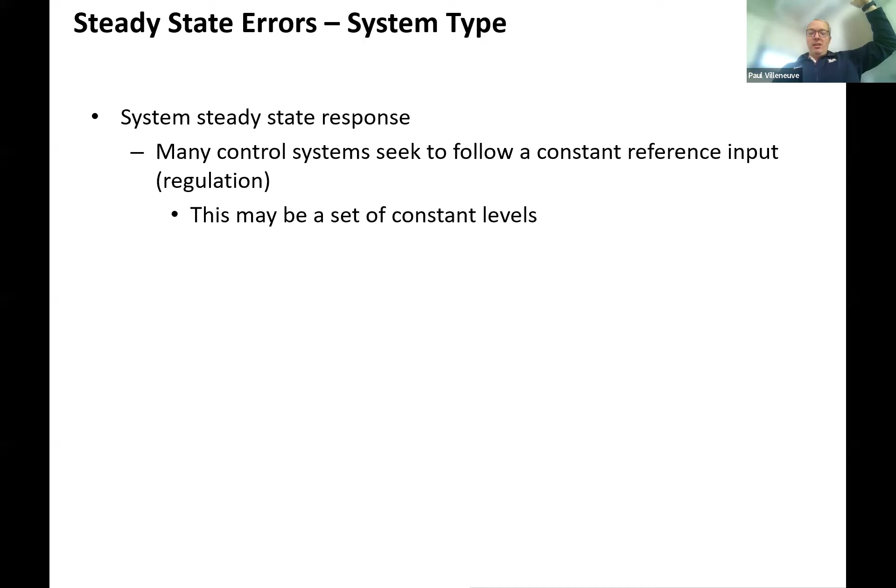Normally, at least in the process control world, we want things to go to a set point that's fixed, right? We want it to be 82, 36, whatever value we want. It doesn't necessarily have to be, though.

So maybe we want something that is ramping, like tracking. You're trying to track a missile, let's say if you're doing defense and tracking a missile in the air. The distance away from you is increasing, probably at a ramp rate, or maybe its speed is increasing. We don't necessarily know, so if we're tracking something, we need to be able to adjust at a ramping rate.

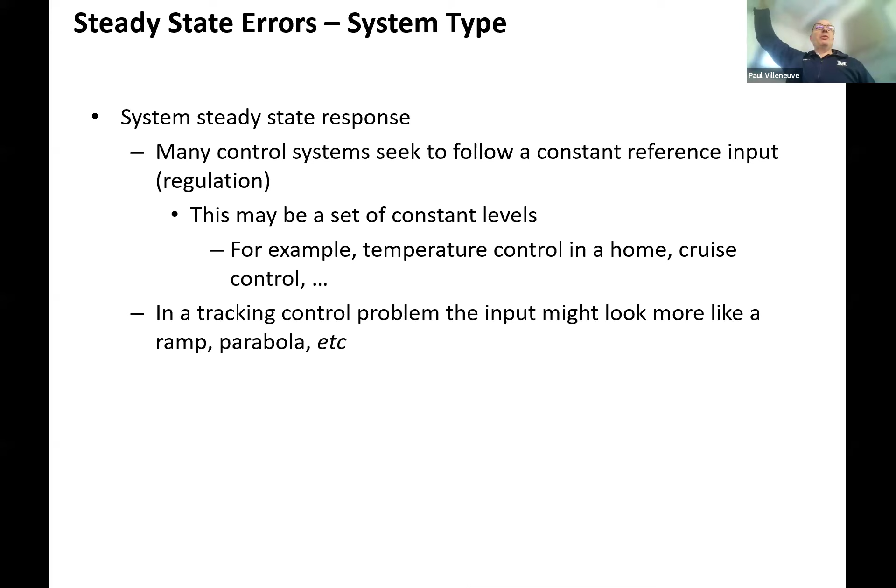We could also do sinusoidal, oscillatory ones, but we tend to not worry too much about those, because for the most part you don't want something swinging back and forth necessarily. That would be very difficult to control. So let's take a look at our control system.

This is a closed loop control system, and you'll notice it has unity feedback. This is not a requirement of a system to calculate steady state error, but it's usually preferred and desired. The reason why: this is my set point and this is my output. My error should be the difference between the set point and the output, right?

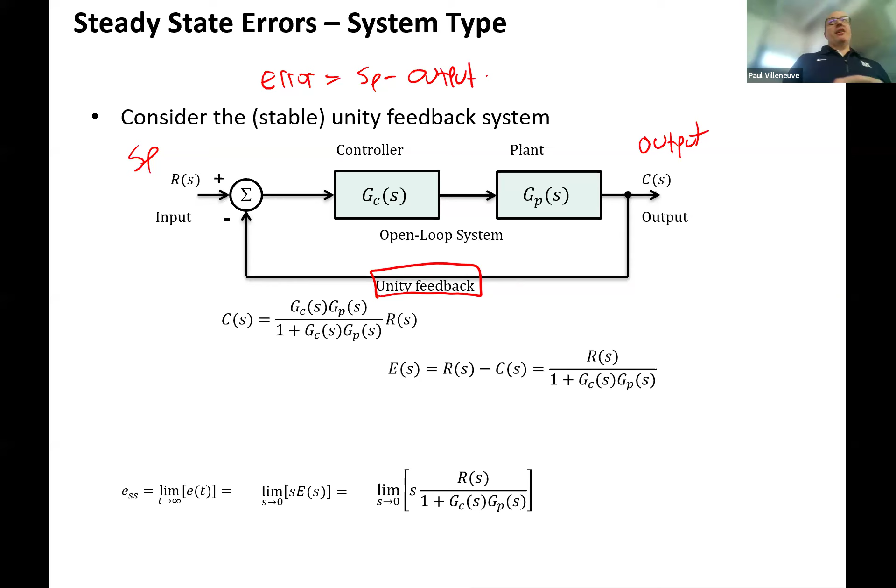So if your output can't be exactly compared against your set point, then you have to put an H block in there. Technically speaking, you aren't really calculating steady state error if your H isn't unity. It's still okay though. So technically this signal here would not be an error signal, it would be maybe a delta or a difference between my set point and the fed back output. So it's not a direct comparison.

But if we assume H is going to be equal to 1, then we're in good shape. If H is not equal to 1, what changes? The only thing that changes is we have to include an H over here. So if H is not equal to 1, you'd need to include an H here and then an H here. But for now, let's just assume H is equal to 1 to make it easier.

These two blocks are in cascade. How do I manage blocks that are in cascade? What do I need to do to them?

Multiply them together, so this becomes GC and GP. This is negative feedback. Remember, the transfer function for a system in negative feedback is the forward path over 1 plus G times H. H is equal to 1.

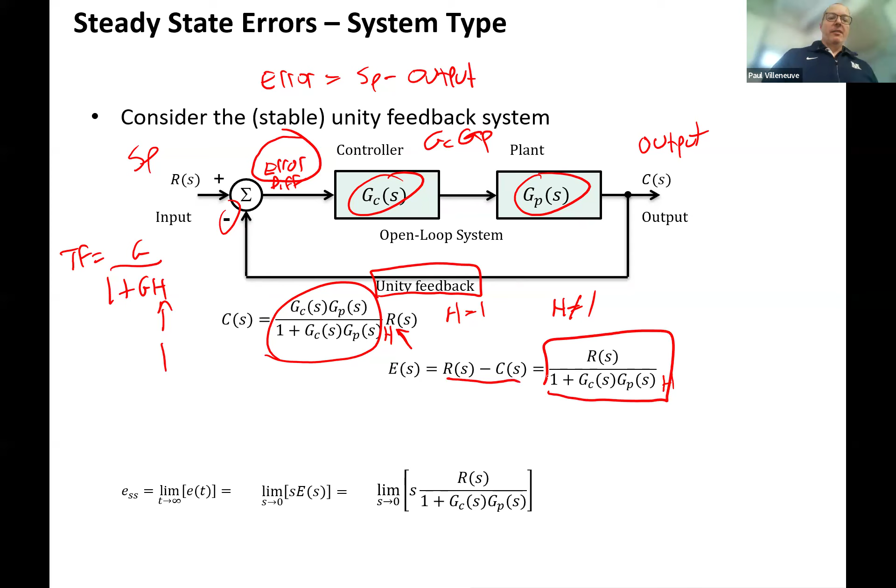Does anybody see or want to see how I got this expression here? Or does it make sense to you? How did I go from this part essentially to this? You all see it? Does anybody want me to do the work? How about I just do the work, because I can do it faster.

So R of S is my input. I'm just going to call it R minus C, but C is defined over here as GC, GP over 1 plus GC, GP, times R. Everybody okay with that? That's the error, equal to that.

Now, common denominator, right? So everything is over 1 plus GC, GP, which means I need to multiply that first R by 1 plus GC, GP, and then subtract GC, GP times R. I can see that the R times GC, GP is going to cancel this GC, GP, R. So what I'm left with is R over 1 plus GC, GP, which is that term right there. Just a little bit of algebra to get there.

Okay, now that's the actual E of S system. So if I want to calculate what E of T is, I can bring this back to the time domain doing partial fraction expansion and do all that. Well, what I'm more interested in is over time, what's going to happen, or what does my error look like? Is there a really useful tool that we've discussed in this class numerous times to get us what that error is going to be at a long period of time?

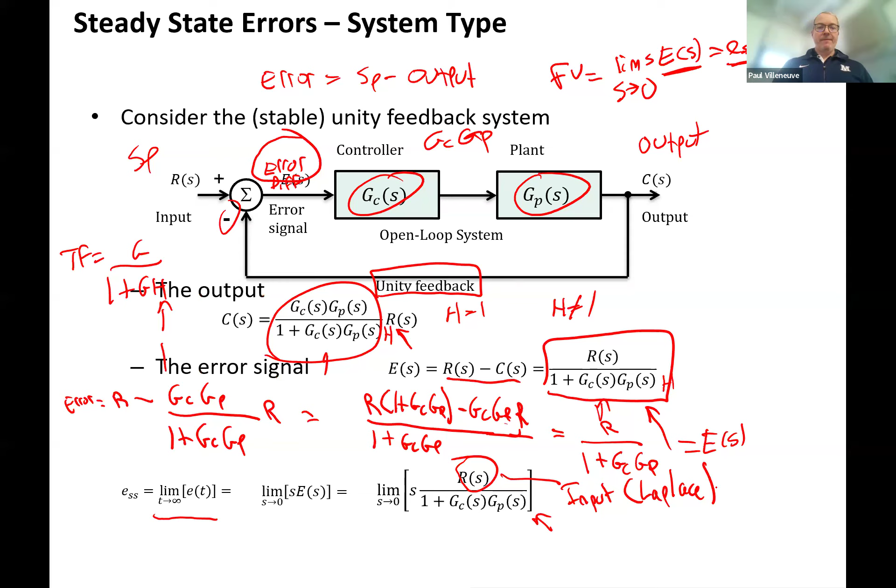Okay. Well, before we can do that, we have to define this term. So we're going to define an open loop transfer function.

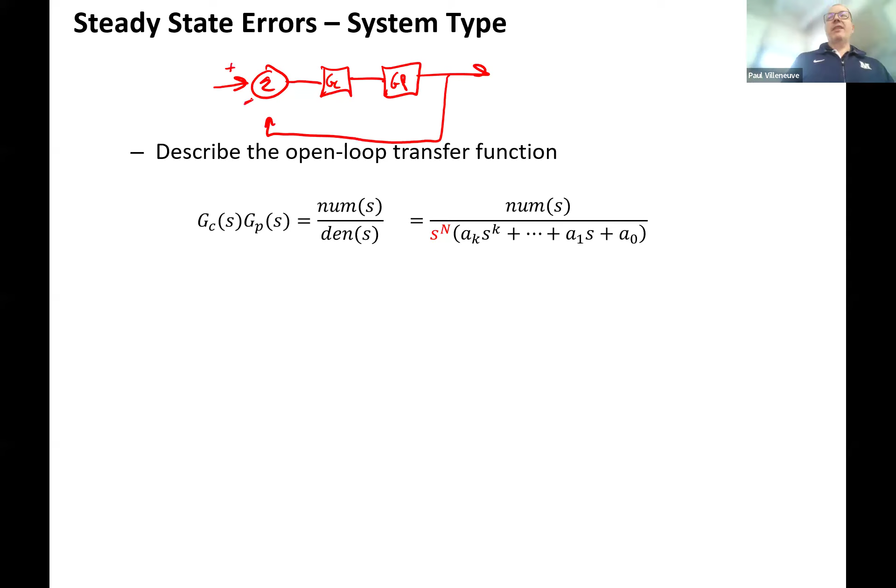And when you think closed loop, we go all around the path. Open loop means stop right there, don't actually close the loop. So if I wanted to get the gain to this point, we'll call this, I don't know, not C of S, but EET for lack of a better expression. We'll call that EET of S. How do I get a transfer function for EET of S?

That's just my input times these two feed forward paths. Stopping right here, that's R, GC, GP. So if I wanted to do a transfer function of output over input, that's just GC, GP. This here is really important to us because it really tells us a lot about the characteristics. This is the open loop gain of our block diagram, and it's essentially open loop because this here is not connected. That's why we call it open loop.

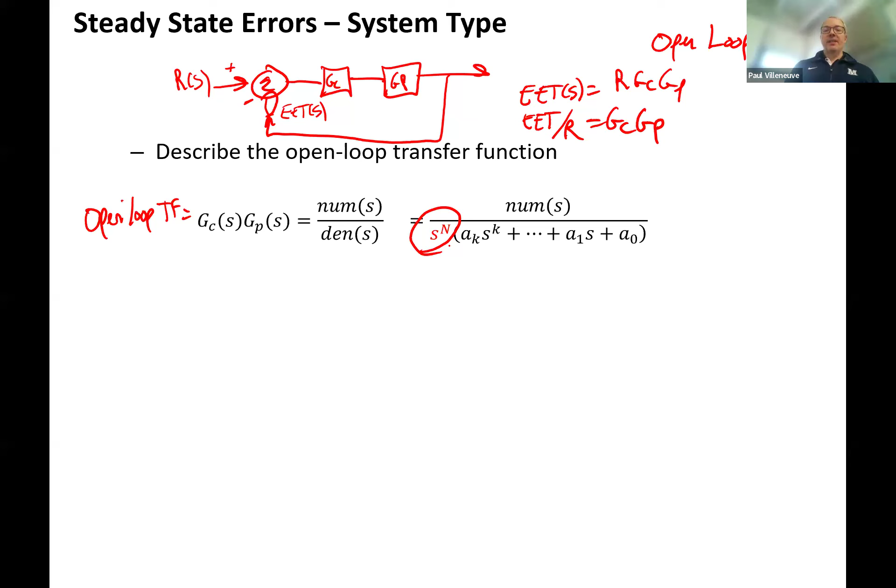The loop is not closed, it is open loop. So if we define our open loop gain or transfer function equal here, we know that when we multiply those out, we're going to have a numerator and a denominator, both functions of S. If we can factor out our S term, so let's say at least one value of S is multiplied by all the coefficients, then we can factor that out front. This term N tells us the number of S's that we can factor out of our system. That's so important, we're going to call that N the system type. So if you have a type 0 system, how many S's can you factor out?

None, because it's 0, because S to the 0 is equal to 1, isn't it? So I can't factor any of those out. I'm just multiplying by 1, right? I can put any coefficient in my polynomial and then multiply it by 1, and it doesn't change anything.

So a type 0 system has no S terms, right? A type 1 is S to the 1, which means in my denominator it's going to be 1 over S. A type 2 system is S squared, which means in the denominator you're going to have 1 over S squared.

What is dividing by S equal to in the Laplace domain? Taking an integral. This is equivalent to integration.

Now let's think for a second. If I have error in my system, does an integrator help or hurt the error? Remember, what is an integrator doing? What is the base definition of an integrator? Go back to your Calc 2 class. What is an integral doing? It calculates the area under the curve, right? So what's that? It would help?

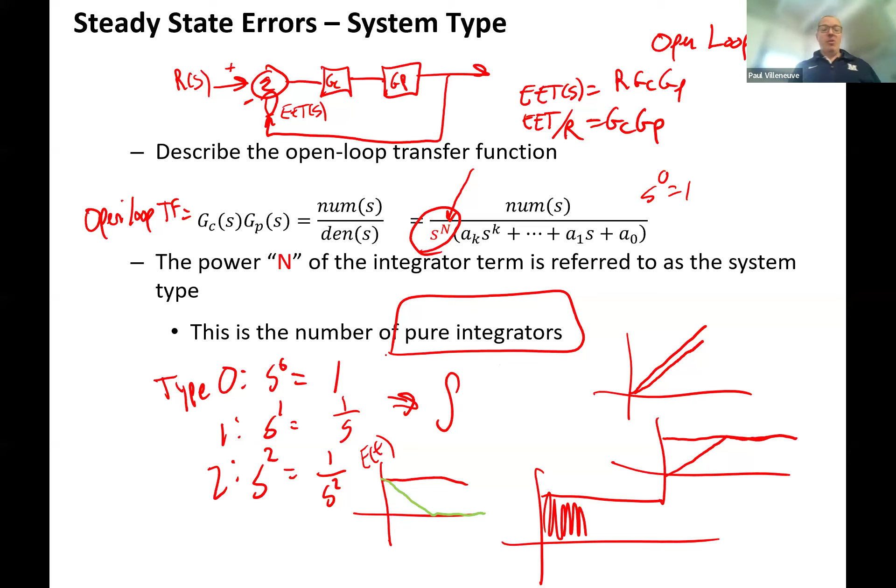What's the bad thing about an integrator, mathematically speaking? It's just perfectly happy if the error is still doing this, right? If it's a rectangle, it's going to keep integrating until it gets to a really crazy high number. And so the problem with integrators is sometimes if your integrator is set too high, it goes to this really high number, and then your control system finally responds, and then you've got to bring the error back down all this way, and then you need a lot of error in the wrong direction, so you end up kind of oscillating back and forth. And so you have these wind-up limits so that your integrator doesn't just go to this really crazy big number, it locks or stops at a certain value. And you can take a look in most control systems books, they actually provide that capability.

All right, so let's do math, and let's take a look at our steady state error. So our input here is a step input. Notice the U of t, that just means a unit step. If you remember from your Laplace table, a unit step input translates into 1 over s.

We got to be careful because a unit step input also looks like 1 over s, where an integrator is 1 over s. But one is an input and one is the mathematical operation. So the transfer function, if it has 1 over s in it, means there's an integrator there. If the block diagram has a 1 over s built into it, that's an integrator. But if I input it with a step input, that's the 1 over s that comes out front. That's the only time you'd see a 1 over s in the input stage, cases when you have a DC or a step input. We'll just pick some random value, some unknown value of magnitude. It could be 1 volt, 12 volts, 5 million volts, et cetera. The value of A is just what it needs to be.

Let's go ahead and plug that into our generic steady state error calculator. So we grab this from before: limit as s approaches 0, s times A over s, which is equal to R of s. We're going to put that right into here, and then divide that by 1 plus GC GP. Now this here, we want to rewrite it: this is A over s times s times 1 over 1 plus GC GP, correct? The s terms cancel out, don't they?

Why do I have 0 here? Let's see. I'm going to bring up the whiteboard. I'll do up the maths so we can see it all. So we'll look at the transfer function again. We'll go back to the base transfer function that starts.

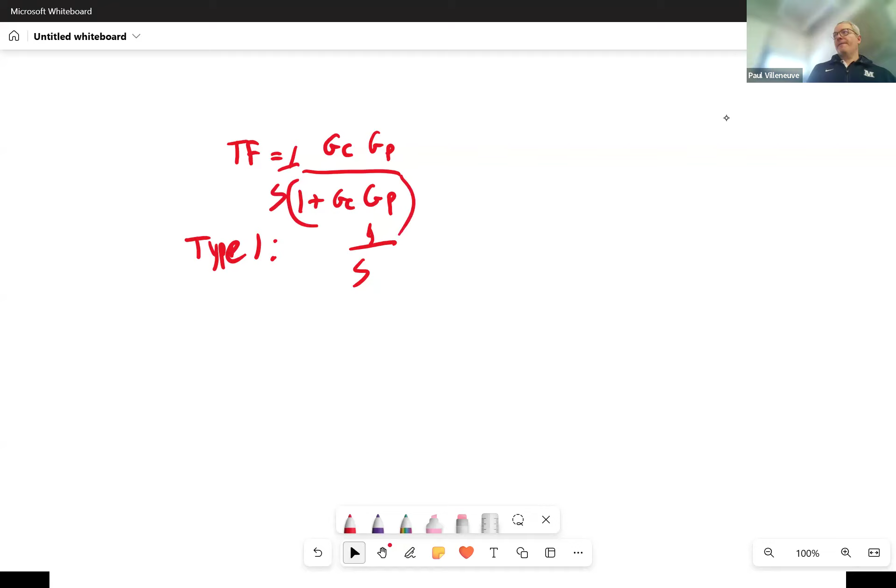Alright, so we had our transfer function equal to GC GP over 1 plus GC GP, correct? And a type 1 system means we have at least 1 over S here. So actually Noah was right, we should have a 1 over S out front of the whole thing, correct? Not just on that term. So that was incorrect. So this here should be A over S times 1 plus GC GP, correct? And if we take the limit as S approaches 0, that whole denominator term goes to 0, correct? So that means ESS is going to approach infinity. Okay?

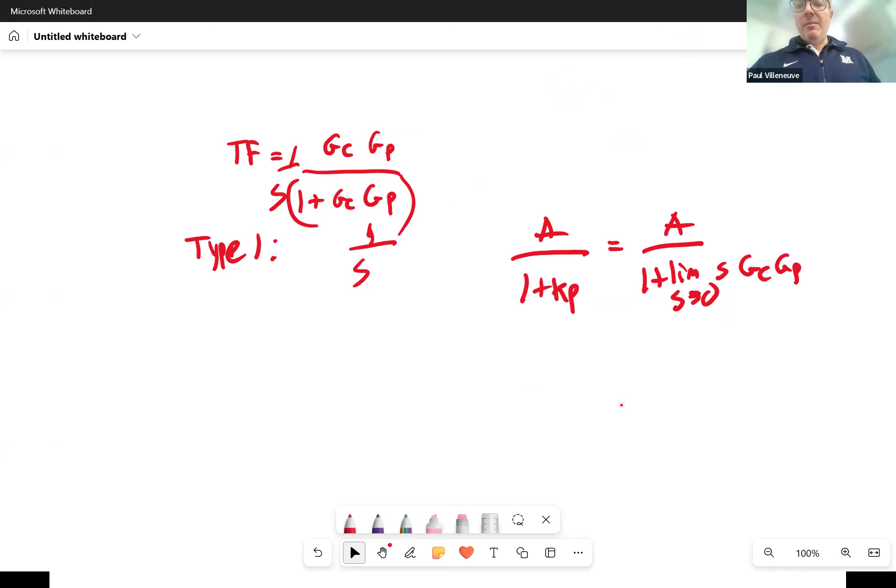So if we have a type 1 system, which means our input is not E sub SS, not 0. It's 1 A... so it's A over 1 plus K sub P, which is equal to A over 1 plus the limit as S approaches 0, S times GC GP. So my K sub P term is going to be equal to the limit as S approaches 0, S times GC GP, which means that's going to be equal to 0. Am I getting infinity?

Let me think for a second. Oh, I get it, sorry. No, it's 1 over S, right? We have an S in the denominator, not in the numerator, because an integrator would be 1 over S. So this is 1 over S, which means that term is infinity, not 0. So A over 1 plus infinity, what's that going to be equal to?

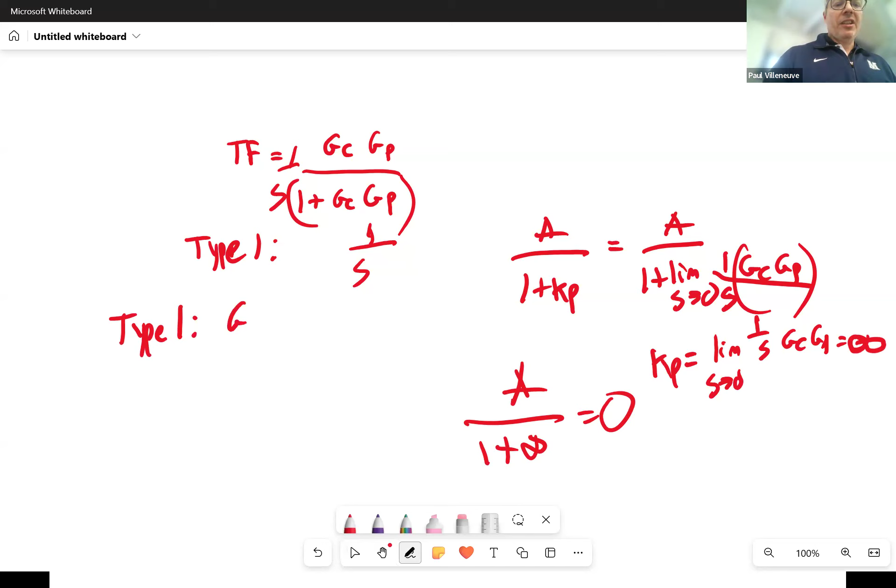0, that's equal to 0. Yeah, so the problem is when I do my, when it's a type 1 system, I should have GC GP is going to be equal to 1 over S times a numerator and a denominator. So when I take the limit as S approaches 0 of 1 over S times that, that's when 1 over S, the S term goes to 0, but the 1 over S term goes to infinity. Say that again.

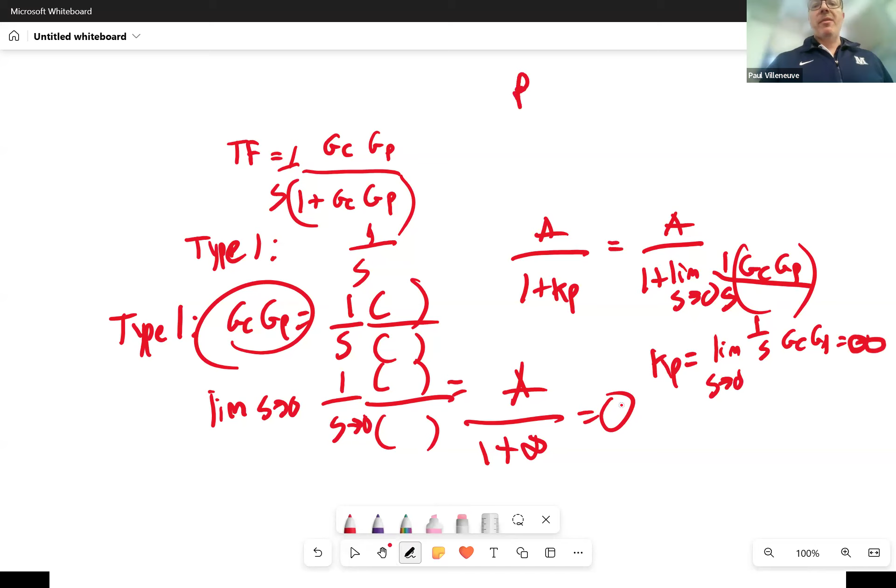Well, this is the K sub P term. There is no A. That's only when I'm calculating the steady state error. The A term comes about, remember, from R of S is equal to A over S. Right? So in the numerator, there's no A term. It's only when we add in the input. So sorry about that, this should be 1 over S there.

So anyway, with a type 0 system, we have to get some steady state error. That's A over 1 plus K sub P. For a type 1 system, our K sub P term is going to be equal to infinity, and our steady state error is going to approach 0, which kind of makes sense. Do you remember how we talked about a unit step input?

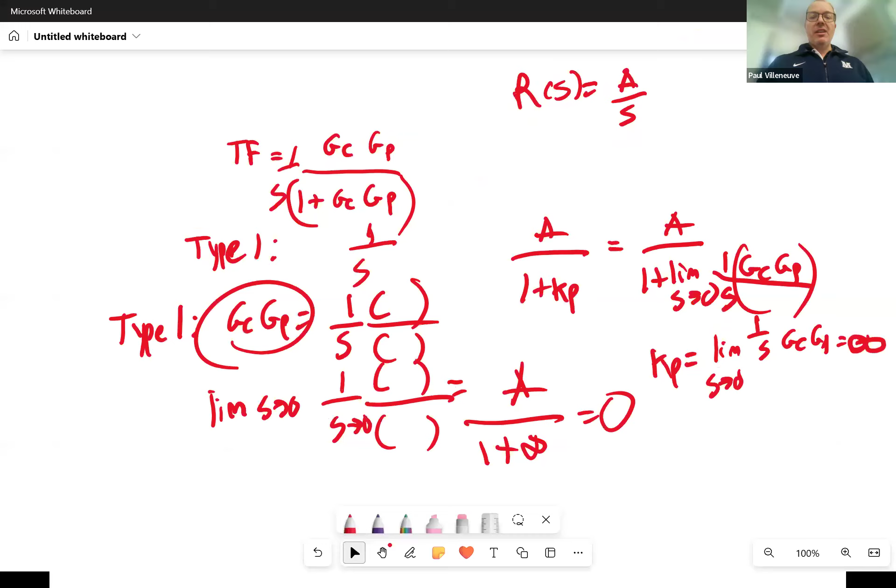So if we have a unit step input here, if we don't have an integrator, if we just have a proportional only controller, what ends up happening is our output is going to do something like this. And that error is going to be constant. Right? So this is the output.

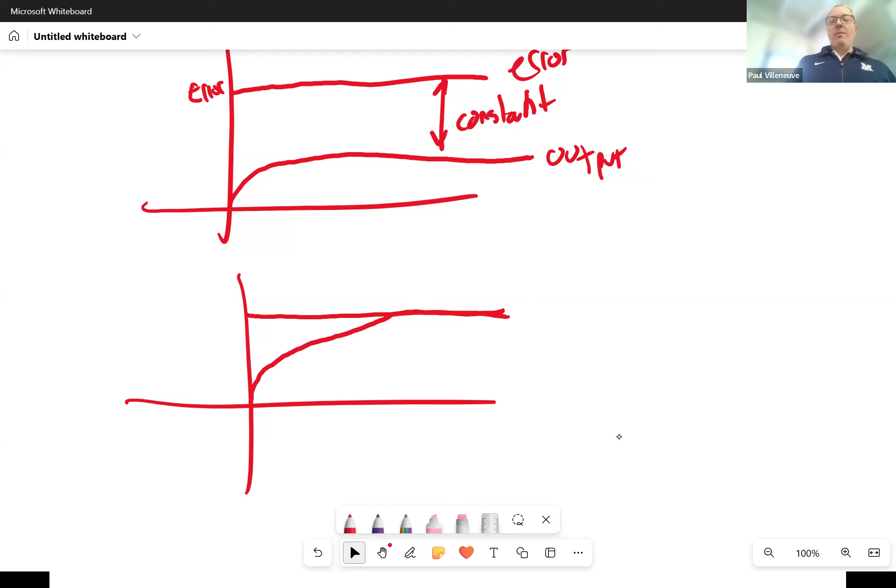And that is the error. If I add an integrator, so this is the error, you know, the nominal error if it was allowed to persist forever. Over here, I have this value. Now I'm going to ramp up, and at some point, my output is going to match what the error signal would be, and then it drops away.

So this would be proportional only. And this would be proportional plus integral, right? So by adding that integrator to our system, we've actually gone ahead and made it so that we get no steady state error. So again, think about it in terms of industry, proportional and integral controller. If we're trying to maintain the tank level at 30%, we can get the tank level to 30% if we add an integral. If we don't add an integral part to our controller, then we're always going to have some sort of steady state error.

Usually not. Why would there not be overshoot? Because this is the error before, right? This is the sort of the pre-error.

What actually happens to the error? I guess I'll change it to purple. The error is actually going to start to do this, right? It's going to drop until it gets to 0 and then goes here, doesn't it? Yeah, like this slope here, you know, it's not continually increasing at a constant value. It's actually dropping down. Why? Because the error here, the area under the curve here, is way greater than the area under the curve here.

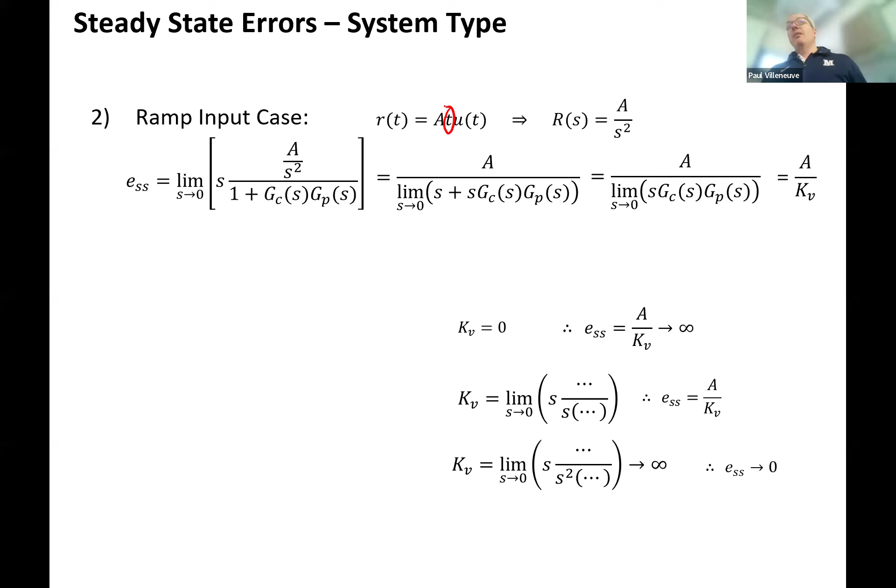All right, so ramp input is A. The only difference now is we have a T term there, right? It's still going to have a unit step multiplier because we want it to start timing at time t equals 0. We don't want it to start at some random time, so we'll start it at time t equals 0 to make our work a little simpler. And this in the Laplace domain is just A over S squared.

Now I'm going to stick that into my generic ESS calculation. And what I end up with is limit as S approaches 0, S times A over S squared, over 1 plus GC GP. As I did before, I'm going to cancel out my S terms. So this one cancels out, but only one of these goes away, right? So the S that I need for the final value theorem only cancels out one of the S terms that are going onto the input.

So now I have A, and I have to multiply. So I move my S down over here, and I'm going to multiply the entire denominator by S. Before, I only multiplied by 1, right? Because these two canceled each other out, so that was multiplication by 1. So we had the 1 plus the limit expression. Over here, we have an S over here and an S over here because we distribute the S term.

A is not dependent on S in any way, shape, or form, so as S approaches 0, it doesn't matter, doesn't care. What about that first S term as the limit approaches 0? What happens to that? Right, because I can break this up into this, this is just the denominator. The first one goes away, it goes to 0, right? So I can ignore it, it's not going to affect anything, it just goes to 0. So all I have left is that second term.

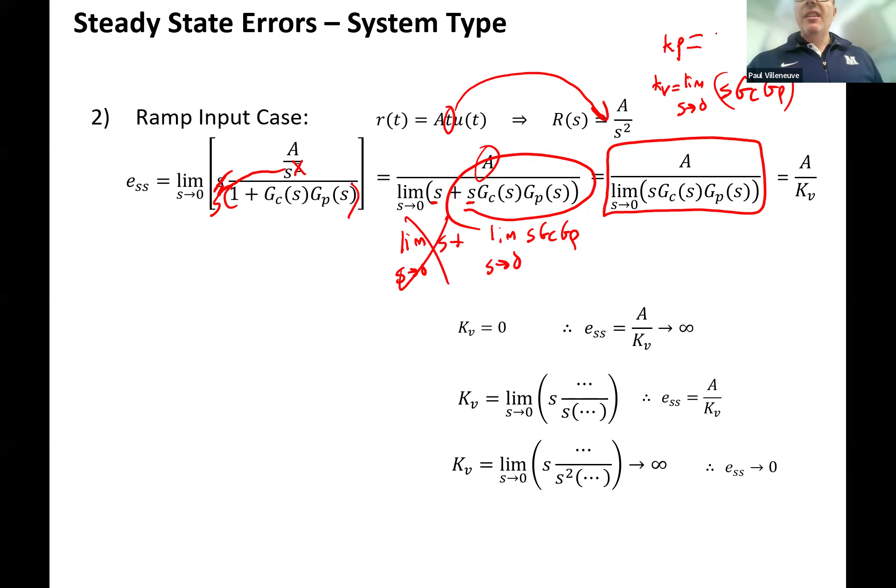Before I called this K sub P, position or proportional constant. What do you think K sub V stands for? Look what you're doing, remember what K sub P was. That was the limit as S approaches 0, GC GP, correct? What's the difference between K sub P and K sub V? The extra S term.

What does the extra S term do? Not yet, just mathematically, like in general. What does the extra S term do? We talked about this all the time last semester. What is the mathematical operation of multiplying by S equivalent to in the time domain? Taking the derivative. If I take the derivative of position, what do I get?

And how do you say rate of change, another term? Slope, okay, keep going. Rise over run. Anything else? Speed. What's another way to say speed? Velocity, starts with a V, right? It's the velocity of whatever it is. Velocity is a more generic term, at least from physics. So velocity.

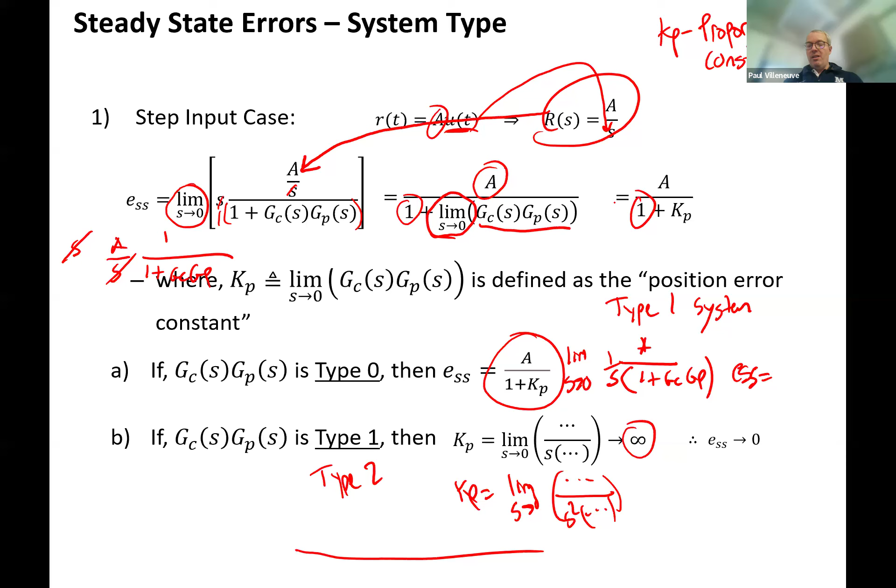So in the case of the P calculation, or the error, the steady state error for a unit step input, we actually had to include the 1. For a ramp input, we only do A over K sub V, and A over 0 is equal to infinity. So it's not A over 1, it's A over 0. So this is equal to infinity. That's type 1, type 0.

Let's move to a type 1 system. Now, type 1 means we have one integrator at S, or one pole at S equals 0, one integrator, and the S terms will cancel out. So now my K sub V term is going to be equal to the limit as S approaches 0, whatever the numerator is and whatever the denominator is. And that's going to be a number, whatever number that is going to be our KV.

And then our steady state error is going to be A divided by K sub V. So what this tells me, if I have a type 0 system and I hit it with a ramp input, I got no chance of keeping up with the output. So this is for a

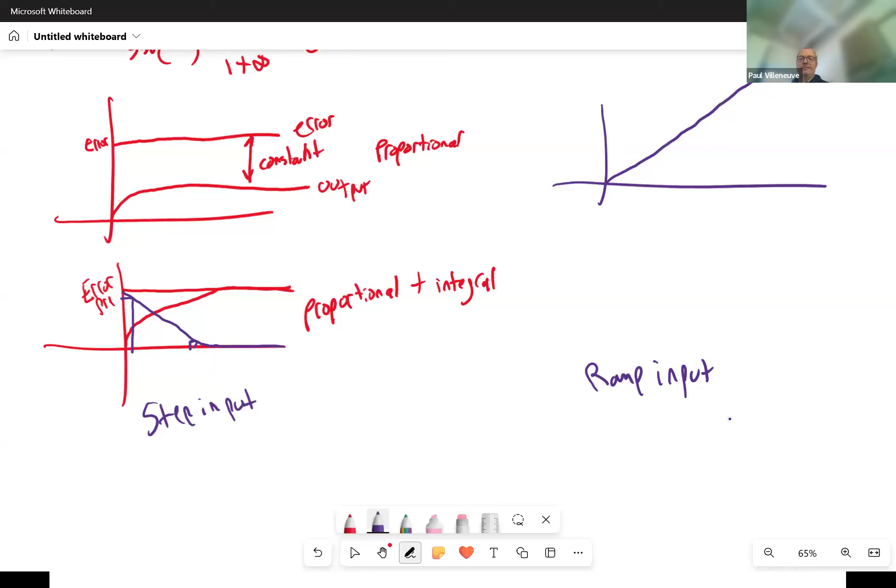step input. For a ramp input, my input is doing this, right? It's ramping up like that. For a type 1 system, let's change the color. Come on, I am selecting it again. Okay. Oops. Let's pick yellow.

For a type 1 system, actually, let's go back to this. This is the input. Now let's go for a type 1 - or type 0, I should say. What ends up happening is my output is going to do this. It's going to kind of stabilize out, right? It's just going to go to a flat value. So I didn't draw that very accurately. Let me see if I can draw that a little bit nicer.

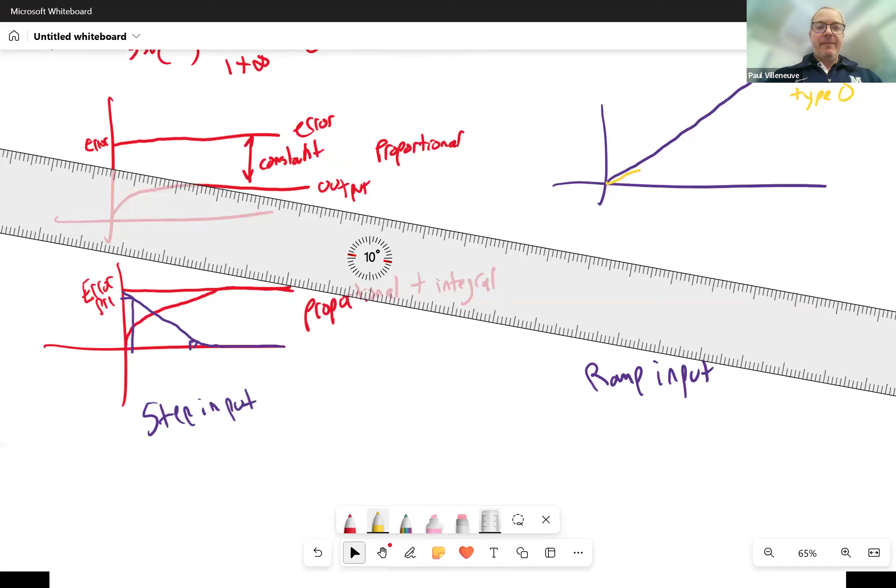Anybody know how to change this thing so that it's not 45 degrees? I just have to rotate it by hand. Okay. So it's going to ramp up to some value. I can get this even Steven here. And then it's going to flatten out.

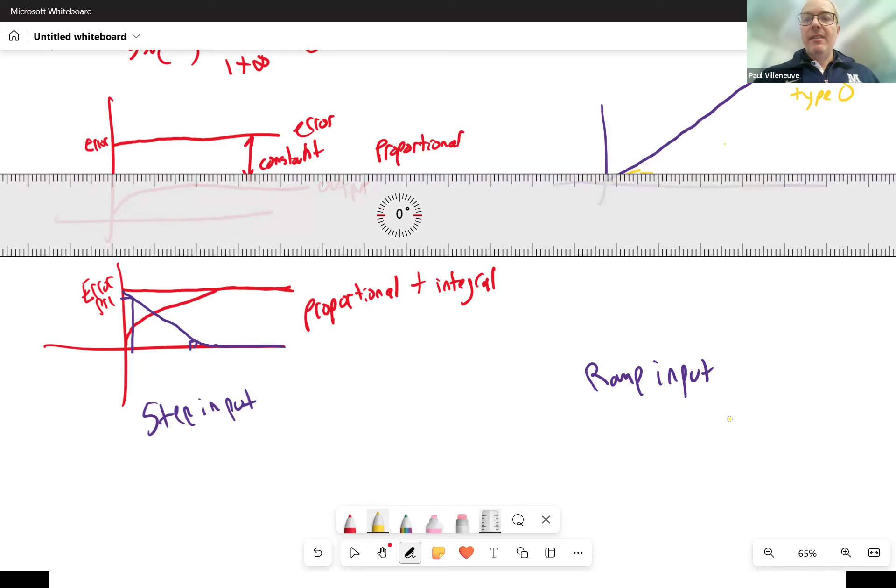So this error keeps increasing, doesn't it? It just gets bigger and bigger and bigger. So if you allow time to approach infinity, then it just becomes infinite error.

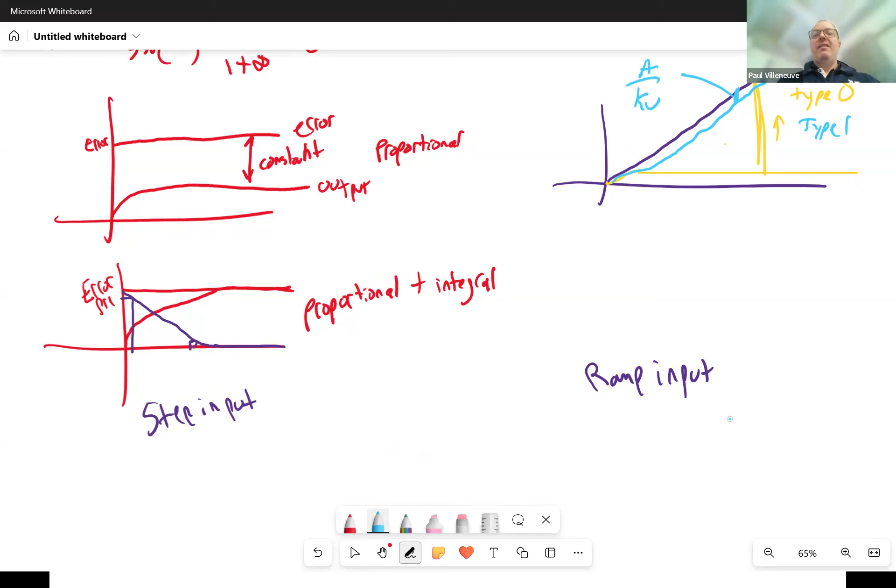Now, if I go to my next input, which is a type 1 system, let's pick blue. A type 1 system is going to kind of maybe start off about here, but eventually it's going to track the input pretty closely. So the error between here is going to be a constant value. This error over here is A over K sub V for a type 1 system.

Let's go back and go for a type 2 system. So a type 2 system, I only will cancel out one of the integrators that's in our original block diagram. So the S here in the denominator, as that approaches 0, becomes 0 in the denominator, but then becomes infinity when you invert it. So 1 over 0, or A over 0, whatever the term is, is going to be equal to infinity. And then when I plug that into here, A divided by 0 is going to equal infinity.

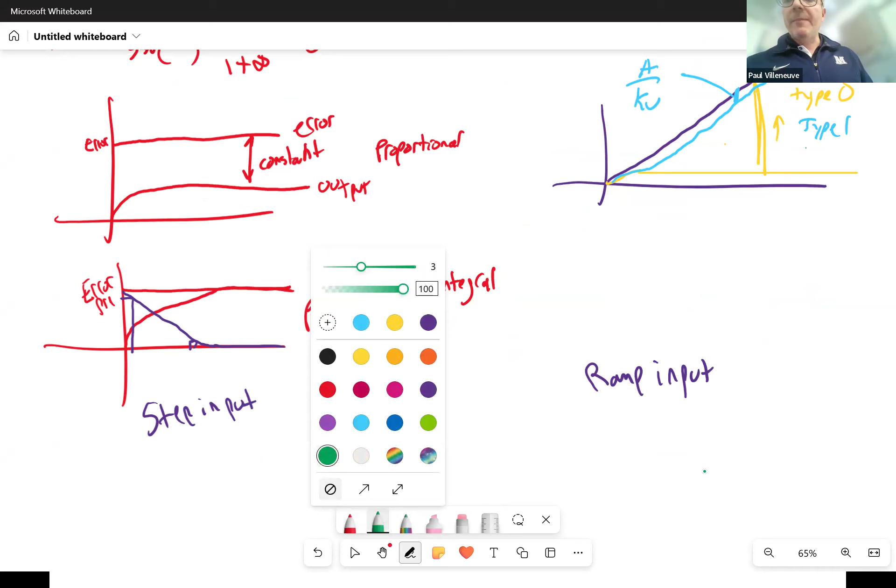So for a type 2, or greater system, you'll have a little bit of error at first, but then it tracks it perfectly. So you have no error, no steady state error. So if you want to hit something with a ramp input, then you need at least 2 integrators in your system. In the real world, you don't often see type 2 or the need for type 2 systems.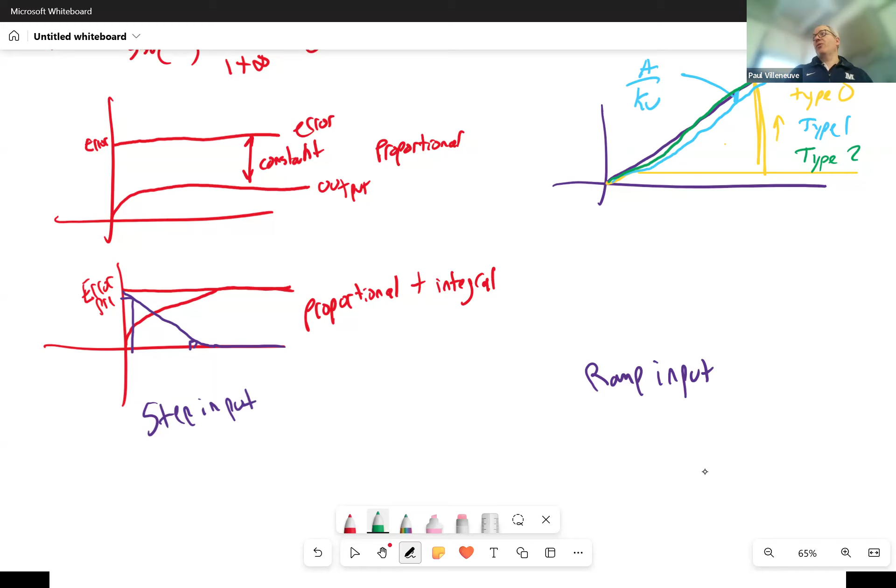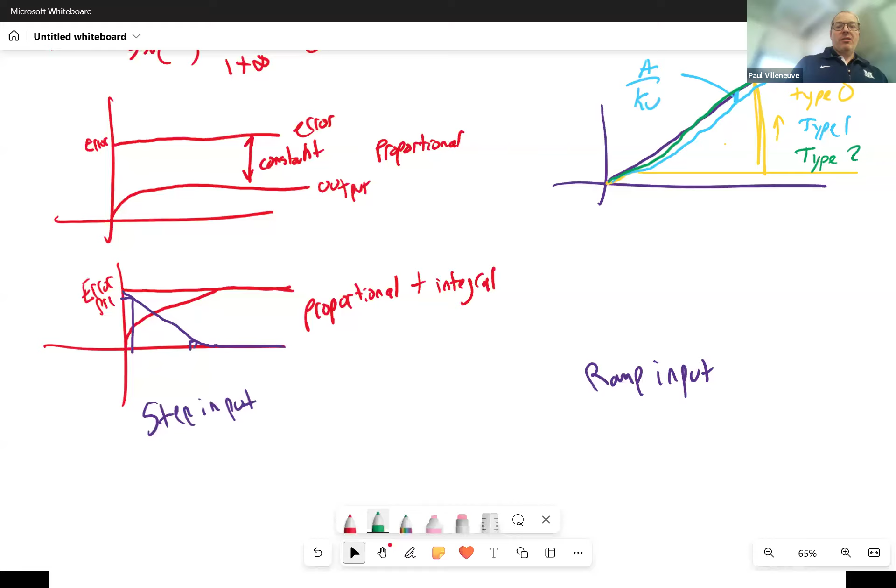And the last case is if we have a parabolic input. Parabolic input is kind of the wackiest of the bunch. So let's do this here. This is a parabolic. It's t squared, so our r is equal to t squared. That's my input, ramping up at a crazy value.

We already have a pretty good idea that a type 0 system ain't going to do much for us, right? It's going to kind of ramp up and then go here. A type 1 system - I don't know why it went bigger, but type 1 system, kind of going to do the same.

How did I pick blue? Why is that coming up? Oh, because yellow and blue make green. Man, whiteboard is pretty fancy, right? You're not impressed? I'm impressed. That ramps like that - again, the errors, nobody's impressed. Yellow and blue make green. Somebody was pretty creative, right? I would have just not mixed them, just said, hey, just right on top of them. It's actually kind of a drag that they changed the color to green, because I'm not mixing two paints together, I'm just trying to show lines on top of each other, but to each his own. It's a little impressive if you're an artist, I guess, but if you're doing engineering stuff, maybe there's a mode we can switch it to. No, definitely not.

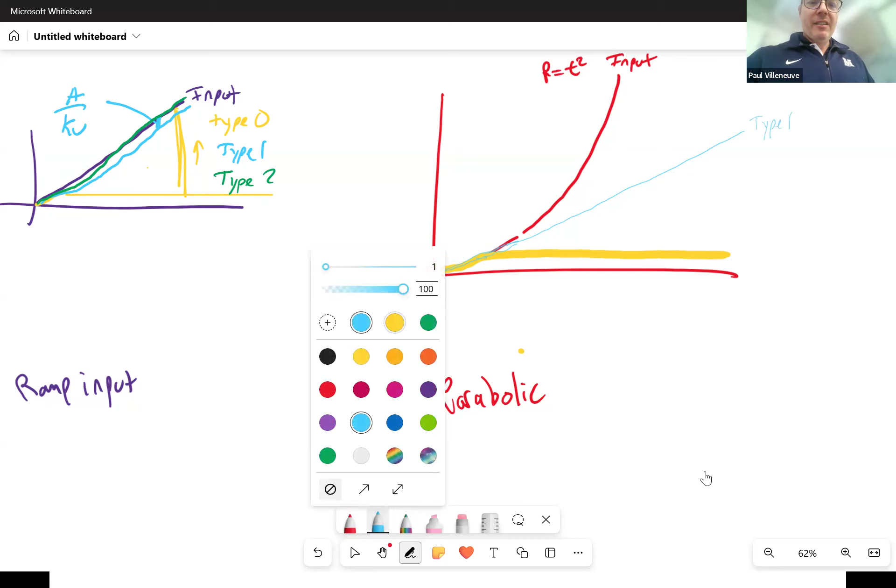So this is a type 1, and I forgot to put the color for type 0. Our next system, we'll call it, is our type 2. And that's going to track it pretty closely, but it's going to have a constant error at the end. So let's see if that's what we end up getting.

So parabolic input - the only thing is we have a t squared there, that translates into an s cubed term. We plug that into our generic term, and we see that this s cancels one of the s's for the input. We distribute that s squared into this, so we have s squared.

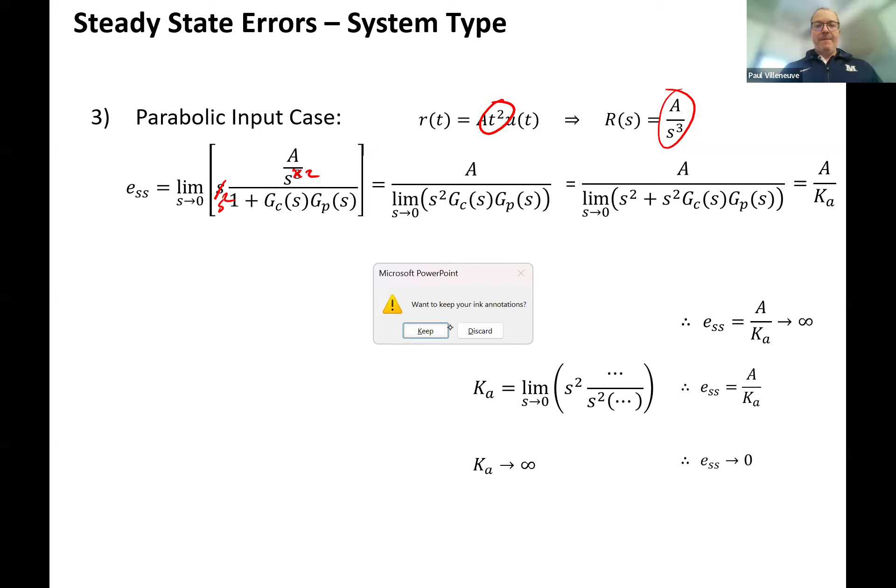This should be - there's a typo here, this should be s squared up front. Let me see if I can change that real quick. Sorry about that. So this should be - we've got to put another parenthesis in here. And if everybody knows, if you're using equation editor, there's a difference between built-in parentheses and the parentheses over here. You want to use these parentheses because they'll resize as necessary.

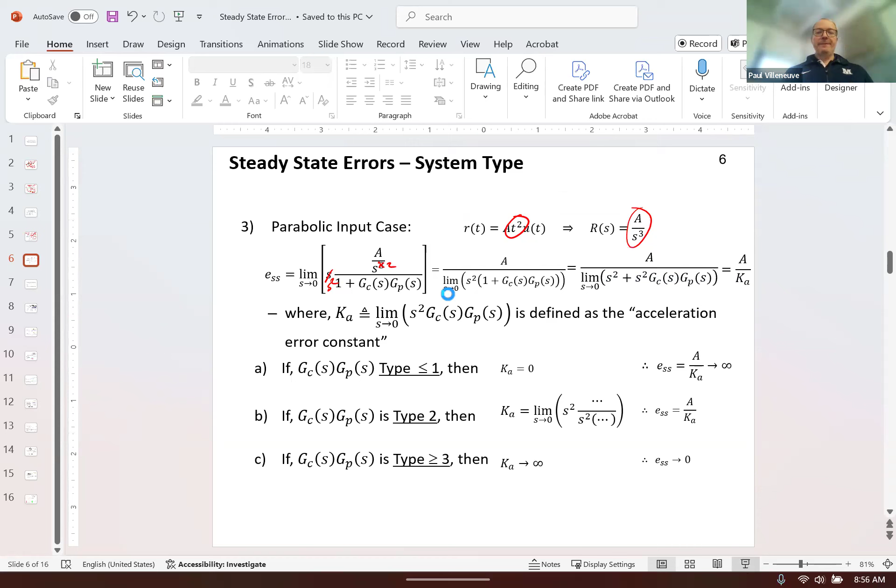So that's 1 plus that. You'll see it'll actually resize here - see, the parentheses got a little bit bigger, so it ends up resizing a little bit. Let me move this up just a wee bit. Move this up. Close enough. Let's go back to here. Switch.

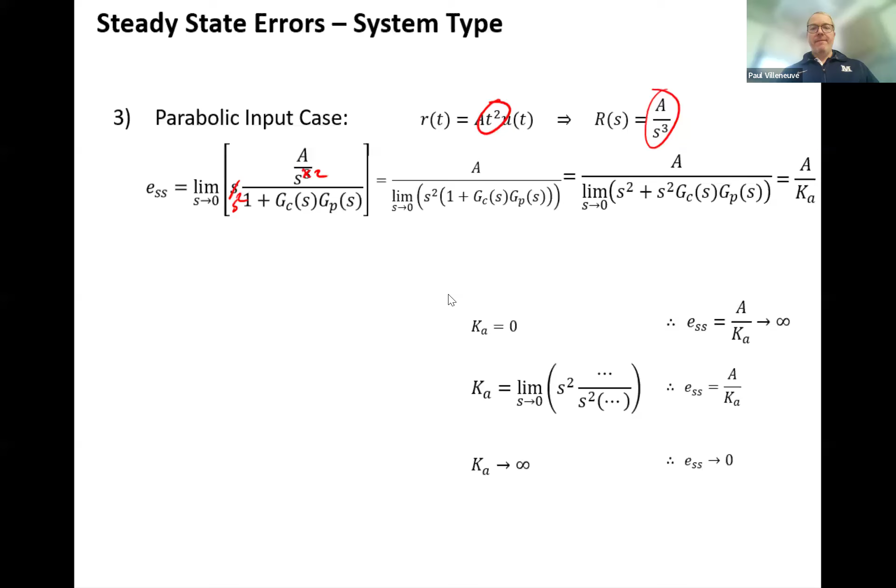So then we have our S squared that's distributed here, right? And we know that as the limit as S approaches 0, it doesn't matter, so this one can go in the trash. It doesn't mean anything. All we're left with is this.

Noah, when you multiply K sub P times S squared, what do you think you might get? Yeah, you take the second derivative of position, you get acceleration. So why do we call that acceleration? Because it's S squared times KP. Remember, you only need to memorize the equation for KP, and then you take the first or the second derivative to get the velocity and the acceleration. Okay, that's all you need to do. Yes, sir.

If the input's T cubed, that would be another one, and you'd have to go with a higher level type system. You need more integrators to make the system work. Yeah, it does impact it - you just have to keep adding integrators. Oftentimes we don't go any higher than the K sub A term, but you can. Does anybody here into RC cars?

Many years ago, we had a student that was really into RC cars. I was like, well, how fast does it go? Oh, that's not the only thing you need to know. You need to know how it accelerates. Acceleration is more important. And then how fast something can accelerate is another term called jerk. So you can actually define another characteristic, but I've never seen it in control systems, which is the jerk characteristic of RC cars - not how fast the velocity changes, but how fast the acceleration changes. So you're taking the third derivative of the system.

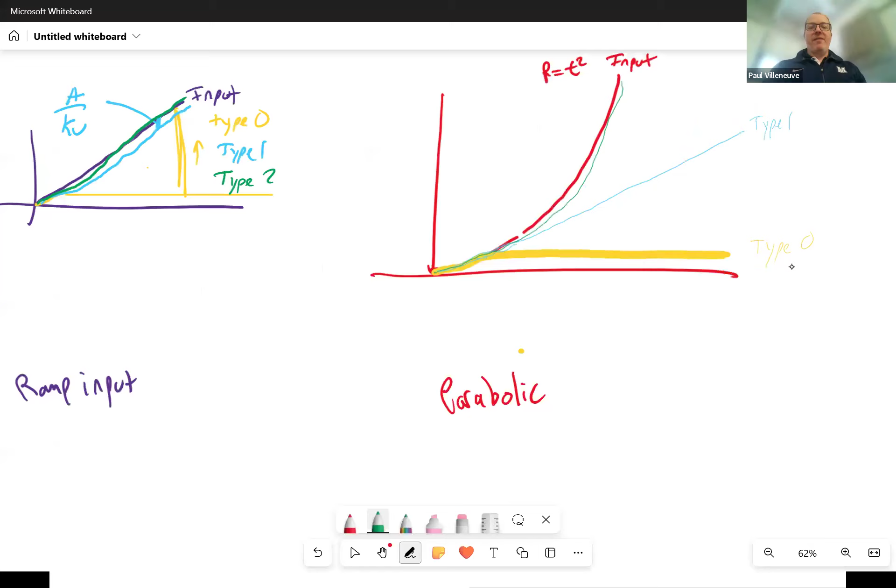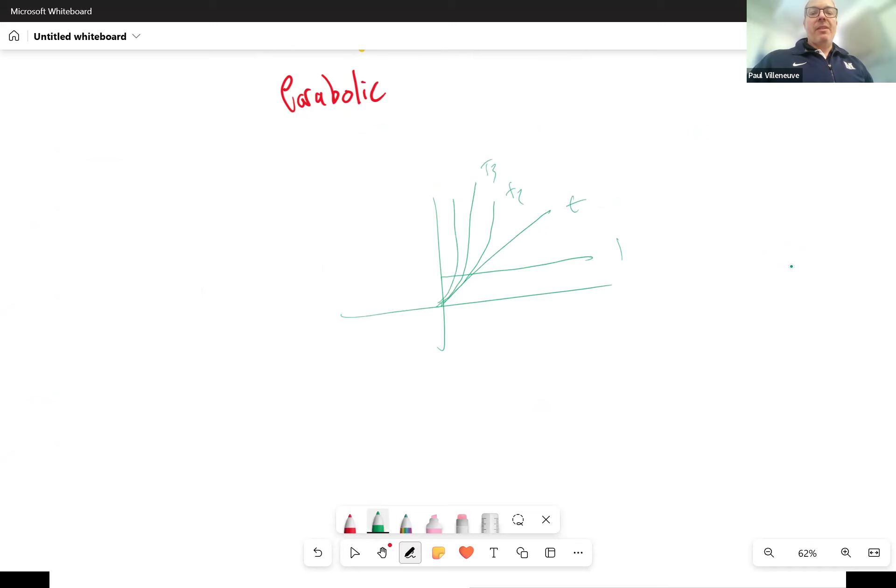I don't know - if you did T to the 5, I think no matter what, and you can correct me if I'm wrong, but if we do this, that's T, right? Oh no, that's 1. This is T squared, and then T cubed. I would imagine it would just be on and on and on, right? It never goes to the right. It always goes to the left because it gets big so fast you can't really see it. So eventually it would almost be a straight line going up, right? You really wouldn't be able to see any. It would almost look like a really high value, but I don't know.

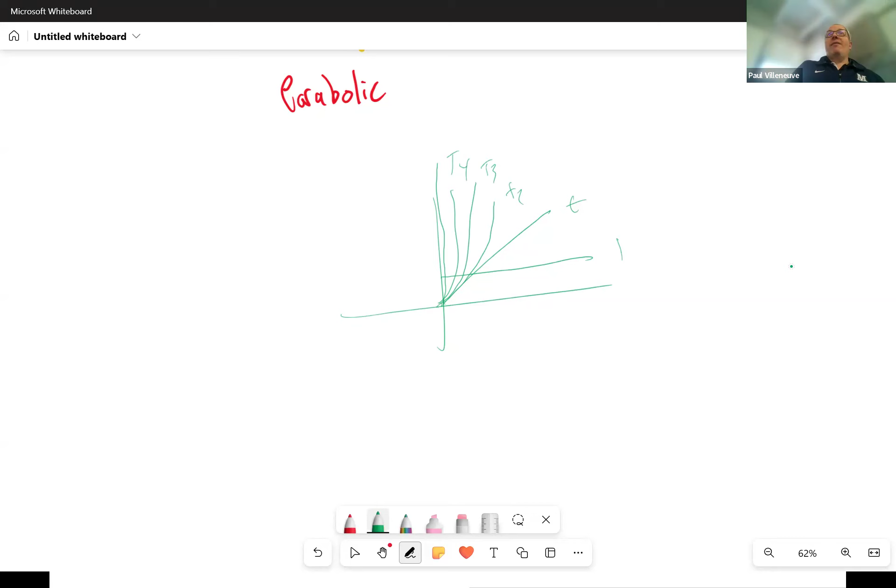So we have Ka, which is our S squared, GC, GP - that's acceleration. Thanks to Noah for picking that up. If it's less than a type 1 system, meaning type 1 or less, this is going to be 1 or less, right? So I'm not going to cancel out all the S terms that are multiplied here. I have at least one S term there. When I take the limit as S approaches 0, that's going to be equal to 0. So in all systems, type 1 or less, my Ka is going to be 0, and my steady state error is going to be infinity, as we've shown here.

For parabolic, we could see for type 0, type 1, and type 2. Type 0, type 1, the error just keeps getting worse and worse and worse. And type 2, it tracks it pretty well. It doesn't get on top of it, but it tracks it pretty well.

So let's move to a type 2 system. The S's will cancel, and I can get an actual number for K sub A. I don't get infinity or zero. So this is going to be a constant - a value that is different - I'll put the final value in there.

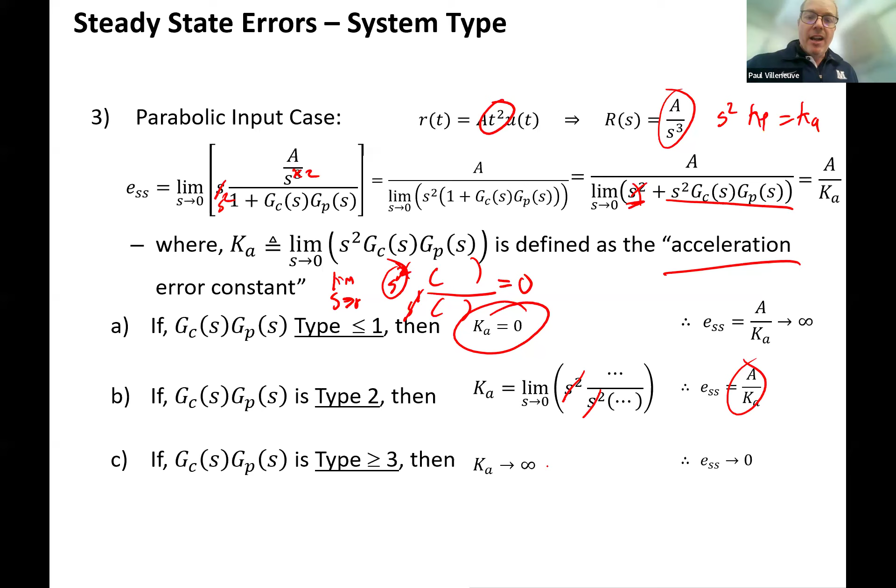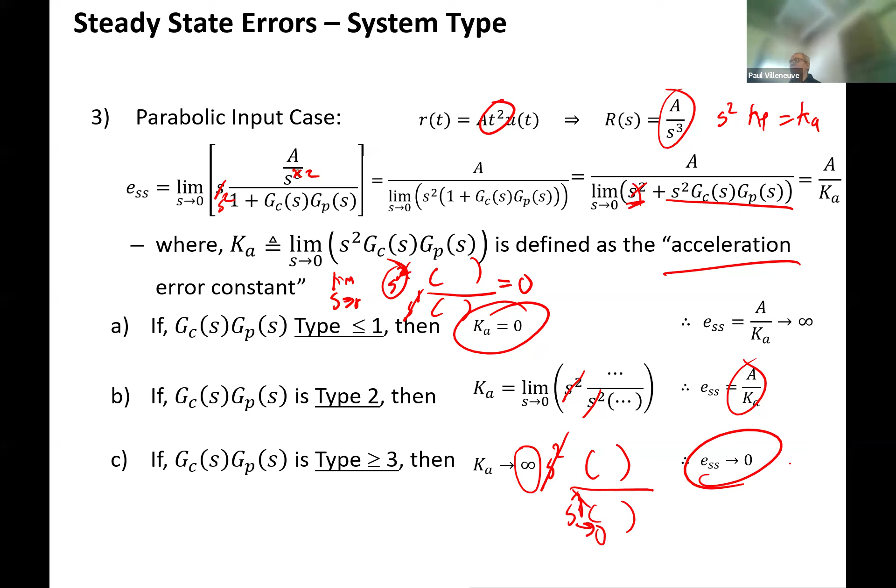And then for a type 3 system, now I have S squared multiplied by an S cubed term. That goes away, but not all the S terms in the denominator go away. So when I take the limit of that as it approaches 0, that goes to 0. So my Ka term becomes something over 0, which goes to infinity, and my steady state error goes to 0. Okay, so in summary,

we can build a table, right? And we can do system input. So we have a step, ramp, then parabolic. And then we have the system type - we have type 0, 1, and we'll just stop at 2. So these are the system types.

So if it's a type 0 system, my K sub P is going to be - no, that's steady state error, sorry - my K sub P is going to be the limit as S approaches 0 of GC, GP. My steady state error is going to be equal to A over 1 plus K P. Let's move these down a little bit so I have some room. That's for my step input for type 0 system. For type 1, no calculations necessary. And for type 2,

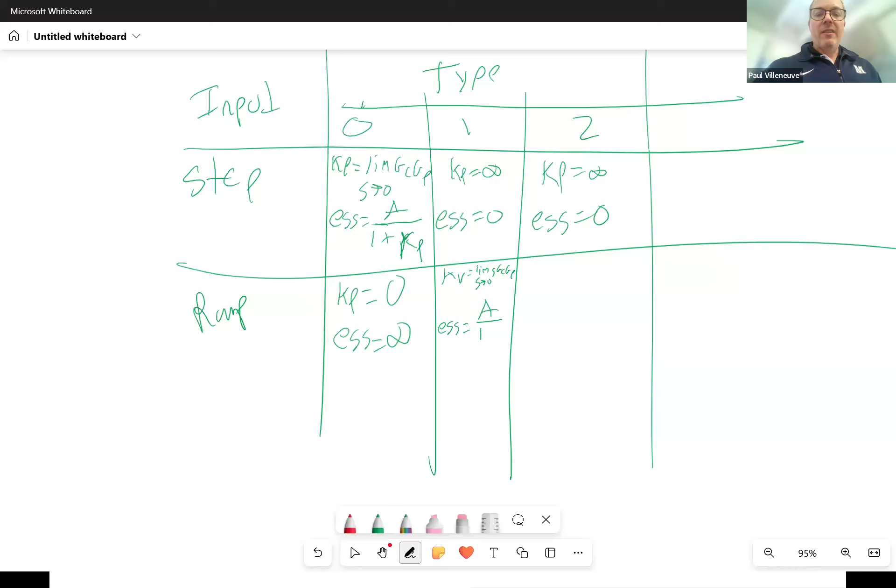Over here, now I'm calculating KV. Let me zoom in a little bit so I can give myself some room. K sub V is equal to the limit as S approaches 0 of S, GC, GP. And my steady state error is going to be equal to A over K sub V. For type 2 system, K sub V is going to be equal to infinity, and ESS is going to be equal to 0. For parabolic,

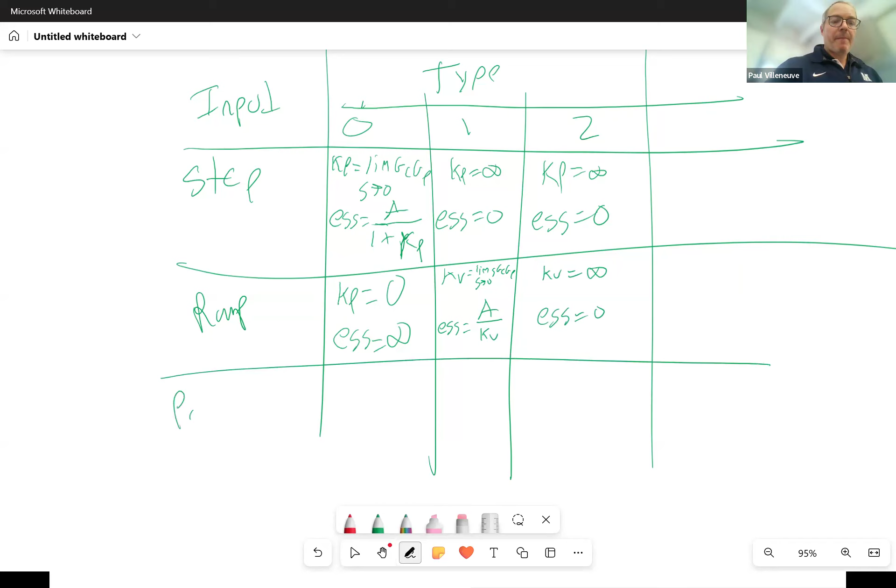this is really easy, right? K sub V equals 0, ESS is equal to infinity. My K sub A now is the limit as S approaches 0 of S squared times GC times GP. And my ESS is A over K sub A.

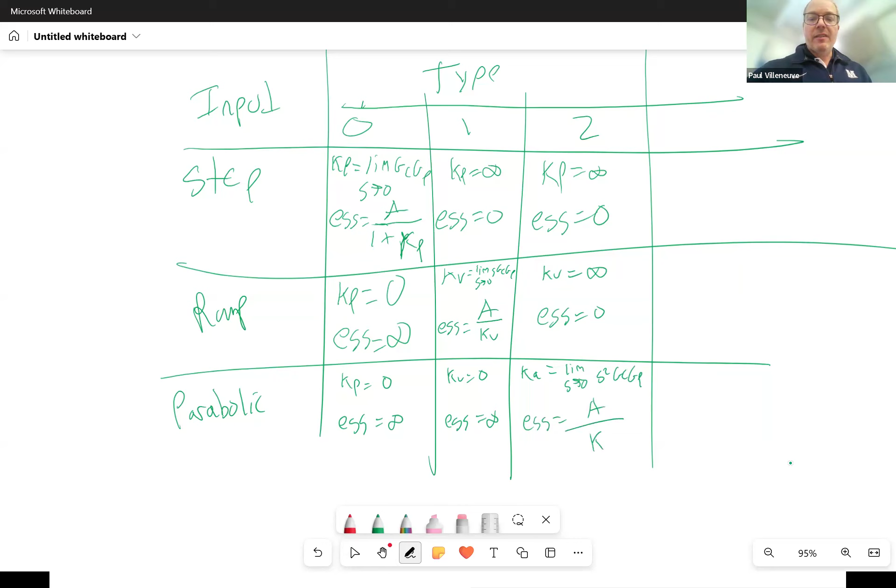The only thing you need to remember is K sub P is the limit as S approaches 0 of GC, GP. Then KV is S times K sub P, and KA follows similarly.

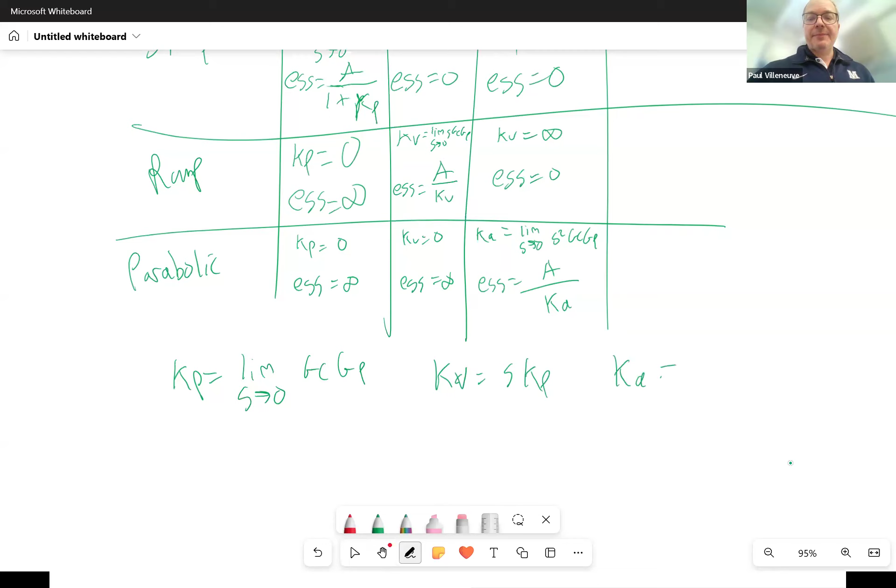When you do these problems, on the homework, you need to identify what's the input, then go to that row, then what's the system type, and hone in there. If it's a type 0 system for a step input, you do your calculations here. If it's a ramp and it's a type 0 system, you have no calculations to do, you can just go ahead and specify it. So use this table, write it down, use this table when you do your homework and tests.

Anybody here have the FE review manual? What do they call it, the study guide, not the study guide, but the actual handbook. I'd like to show it to you, but I can't run Edge, it seems like the computer... So, FE electrical handbook. Oh no, I don't know if I have one of those. Let's see, maybe Mississippi State has it accessible. I just want to look at it, I just want to see the control systems. So I don't know, is it 471 pages? Yeah, oh wow, let's change then.

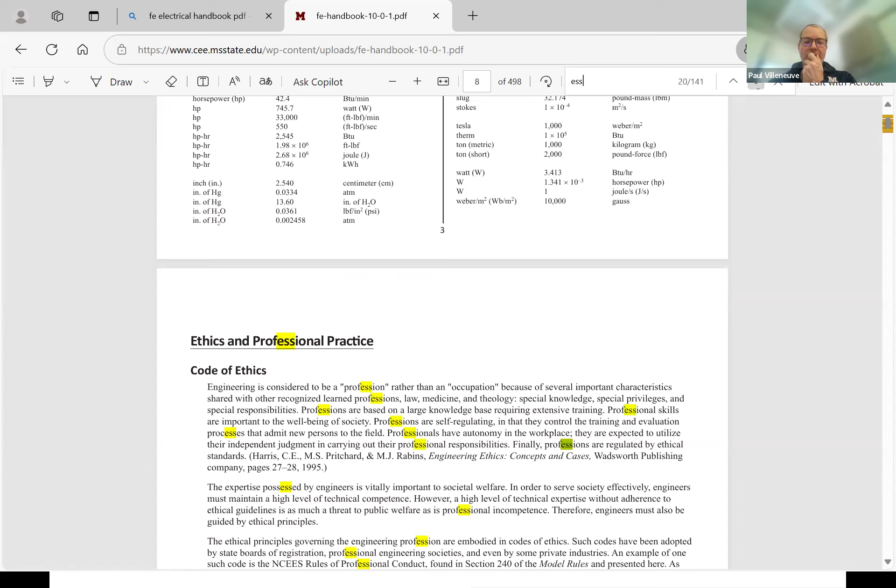It used to be in the old manual, you had 70 pages or whatever, you could find it really easy. So this is brand new.

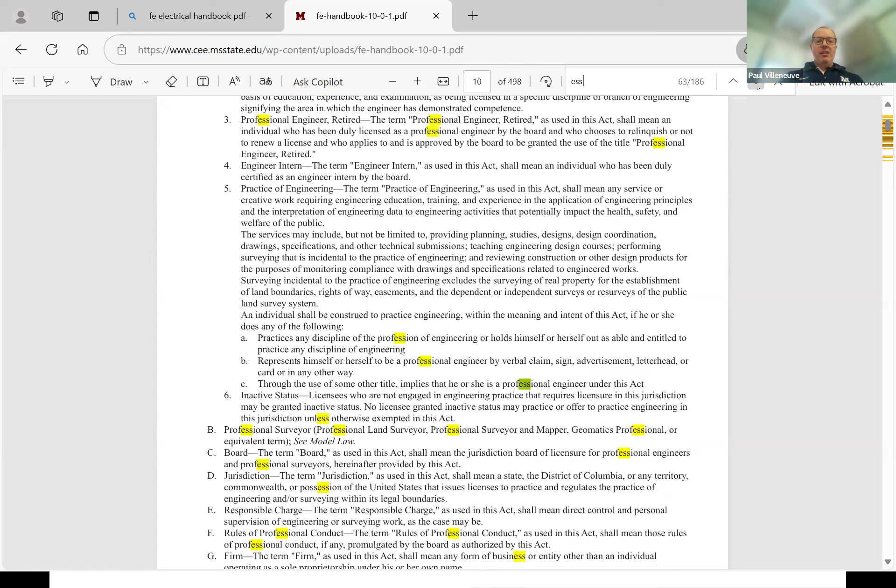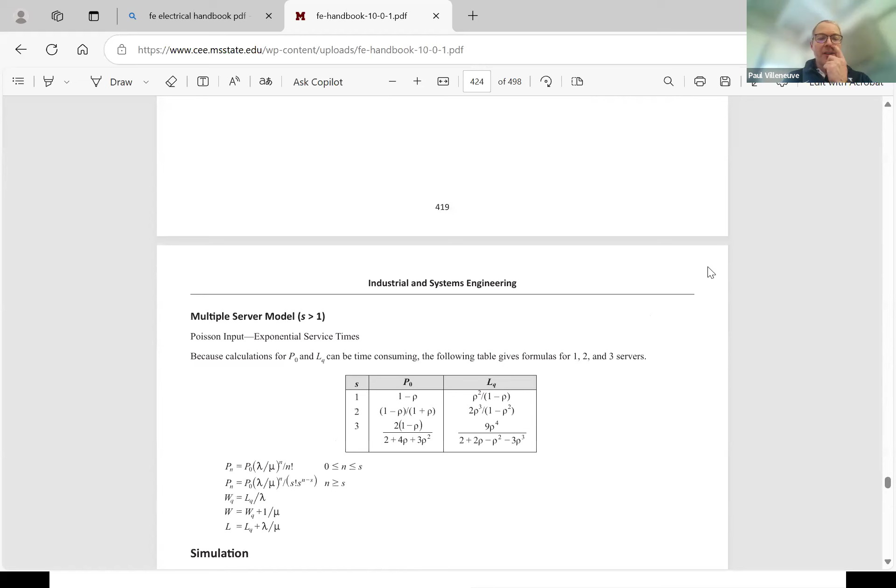Nope, no, you did an electrical one and they just gave you one book instead of having 500 pages. This is absurd, let me just see if I can go to the electrical section. 417 is the electrical section. Okay perfect, let's see, you guys are good. Wakes up. Come on. Might not be able to wake it up, but if you look in here they do have, if it ever wakes up, here we go. That's 417, what happened? I don't think it's under the systems engineering, I think it's under... Here, let's do this, instead of going to that one, that's crazy. Let me just look for the electrical one, I don't want the new one. But sometimes they keep it someplace else, so I don't dare go to Reddit because that's a dangerous spot.